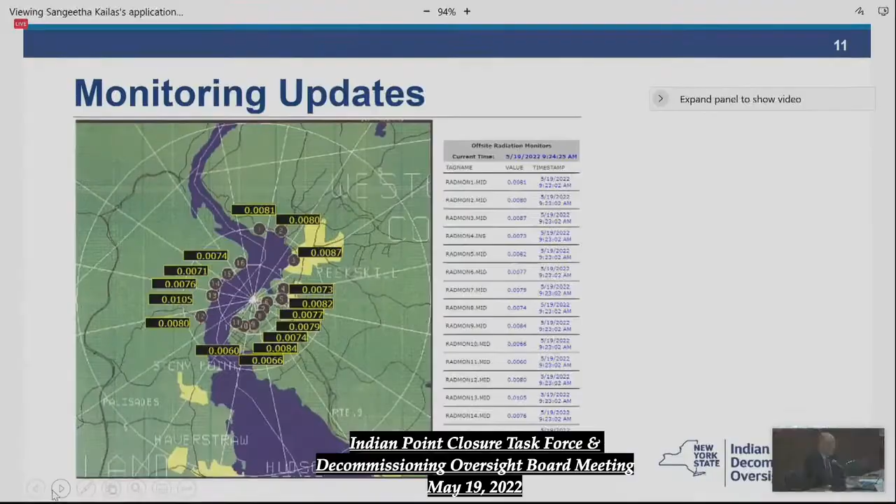In fact, this is an example that Bridget was able to receive this morning. This is this morning's data result from the monitoring. Excuse me, it's yesterday's. There are a variety of monitors in a rough circle around the site, 2 of which are near the elementary school. Again, Indian Point is a unique site that has this capability.

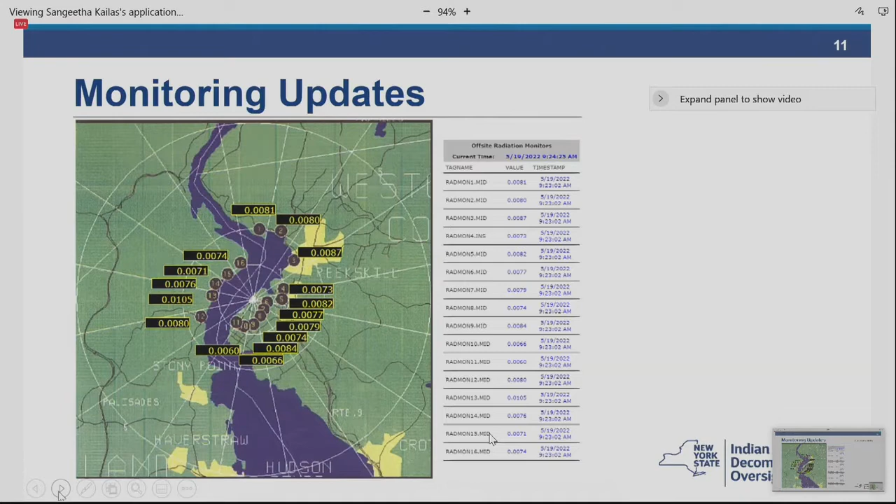It's being maintained in the short term. We think that's a positive step and promotes the public interest. I'm going to just go to the next slide. In terms of our oversight activity, DPS staff continues to visit the site and maintain contact with Holtec representatives, interacting with them on various issues.

As Tom mentioned, the state inspector position is expected to be finalized in the near future. We have also been receiving daily weather reports and other pertinent data readouts every day as required, as Holtec agreed. To date, there have been no safety concerns reported.

Next slide. One of the issues that I'm sure all folks remember from the proceedings over the last several years is financial viability, financial reporting. There have been monthly meetings since Holtec closed on the deal with Entergy, and DPS staff and staff from other expert state agencies have attended these meetings. They occur every month, and it is an opportunity for state regulatory officials to interact with Holtec and vice versa.

Holtec reports that the decommissioning project as a whole is ahead of schedule and is under budget. Also, we have received the annual financial reports that are required under both the federal regulations and the joint proposal. We are reviewing that, and we anticipate having a meeting with senior Holtec staff to review and go over that in the coming months.

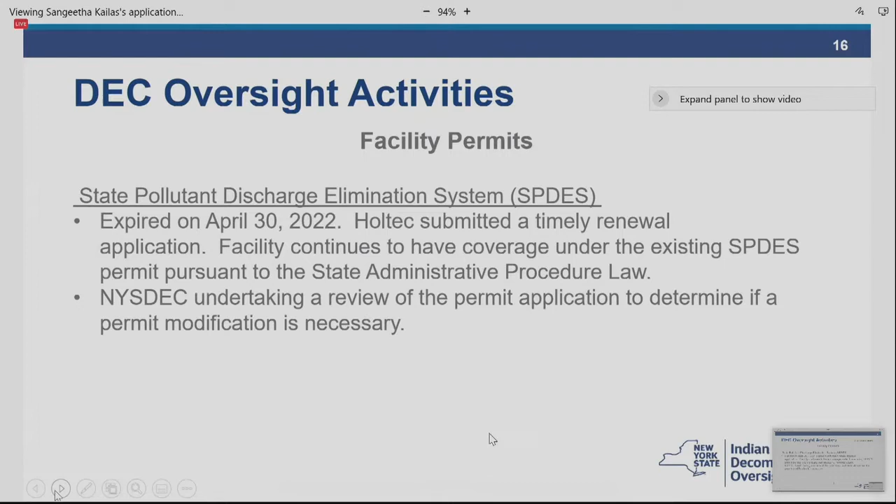Tom, a quickie - public comment on those permits? Public comment will presumably be available on those permits, on the draft SPDES, and maybe the demo. On the citizen participation plan for decommissioning, and I believe also the SPDES aspect, there will always be an opportunity for public comment, and I believe DEC would take public comment into account in its decision-making process. That's correct, John. Oh excellent, I'm so glad you can back me up. Tell Jared I was doing the right thing. Now you can bill him for your time.

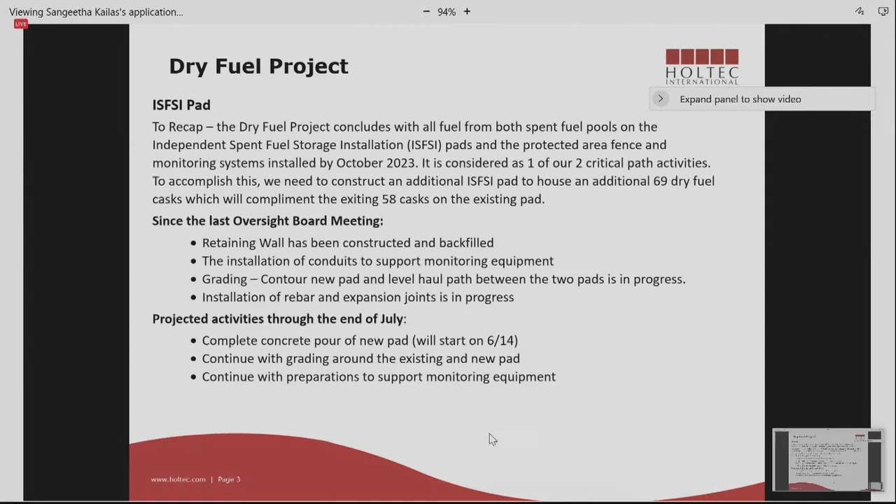So we've installed rebar and continue to install rebar on what's called the mud mat, the subsurface of the ISFSI pad. There'll be another 3 feet of concrete to pour on top of that pad. The rebar is just about complete, and the boxing around the pad is just about complete. We're going pretty well with the ISFSI pad - we expect to be done in the August timeframe. We really won't need it until later on, but we'll be done in August, which is good.

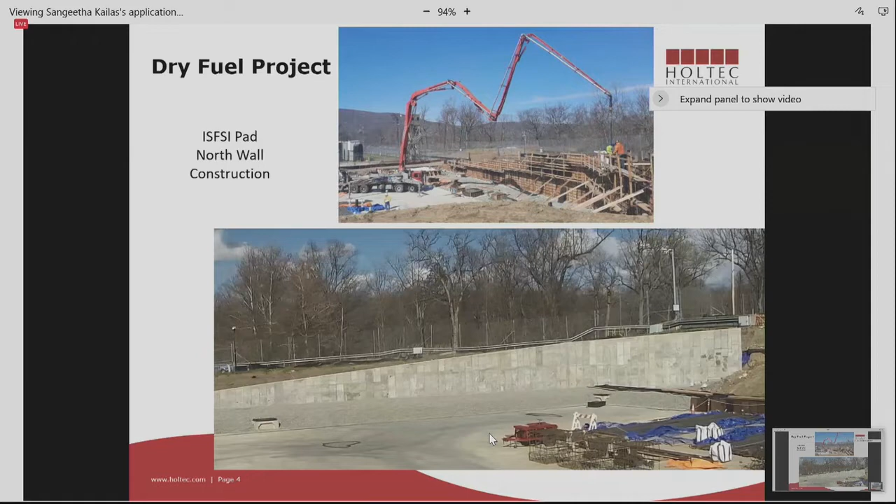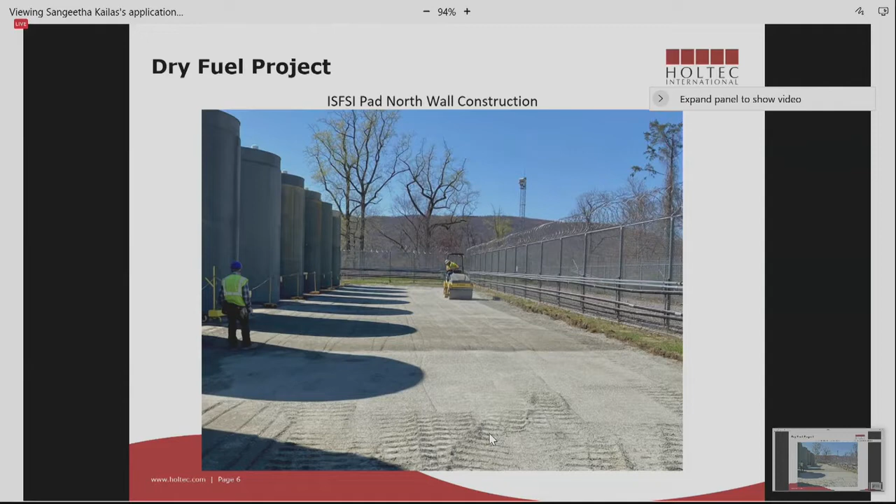The second area we're focusing on is the spent fuel pool buildings themselves. To recap, there'll be 896 fuel assemblies that need to be casked at Unit 2, requiring 28 casks. Then there'll be 1,280 assemblies that need to be casked at Unit 3, requiring 41 casks.

The Unit 2 spent fuel pool offload campaign is scheduled to start in August of this year, and we'll start the Unit 3 offload campaign in February of '23. At the present time, we are on schedule with these start dates. I've had to split the slides into two groupings, one for Unit 2 and one for Unit 3, so we'll start with Unit 2.

Since the last Oversight Board meeting, all fuel assembly inspections were completed satisfactorily - that's a requirement prior to loading any of the casks. The load plan per cask has been finalized, so we know exactly which fuel assemblies will go into each cask, given limitations on dose and kilowatts. We put in a new helium dryer that's being installed - it's going to be more efficient at drying out the casks themselves.

We started transport rail repairs outside the spent fuel pool building, and I'll show you the picture next. Projected activities through the end of July will complete the installation of the helium dryer and complete the rail repairs outside the spent fuel pool building.

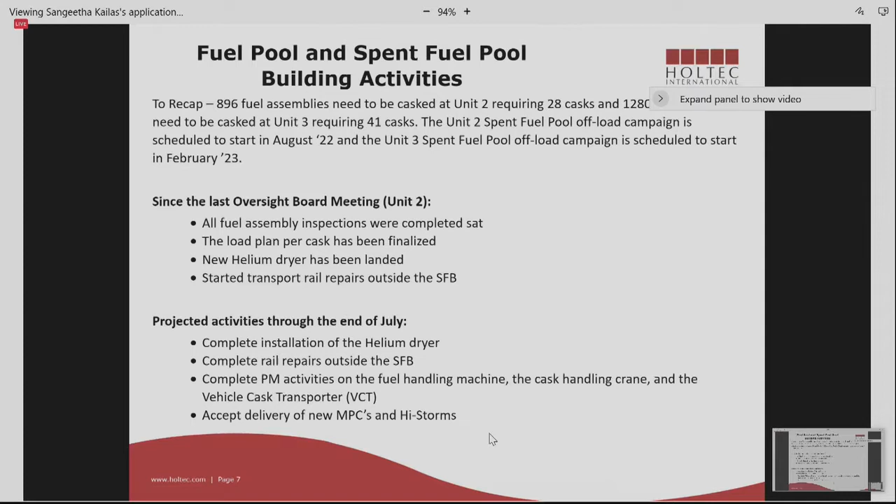Actually what we have to do is what we found in the fall when we did four casks. We found degradation in the grouting of that rail system. That rail system is used to transport the HI-STORM out of the Unit 2 spent fuel pool building. So the grouting was degraded, and we actually saw some of the rollers binding on it. So in order to prevent that from happening again, we're taking all the grouting out. We're replacing all the rails and all the bolting so that we'll have a good system to transport the HI-STORM cask out of the Unit 2 spent fuel pool.

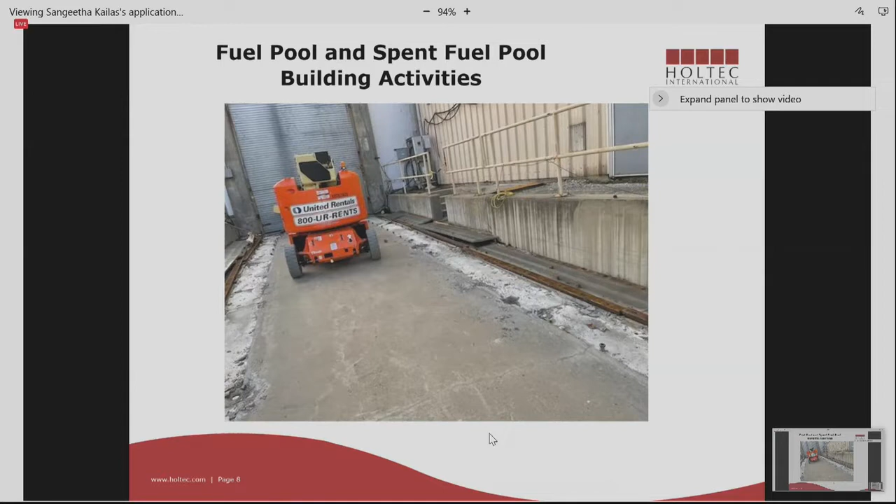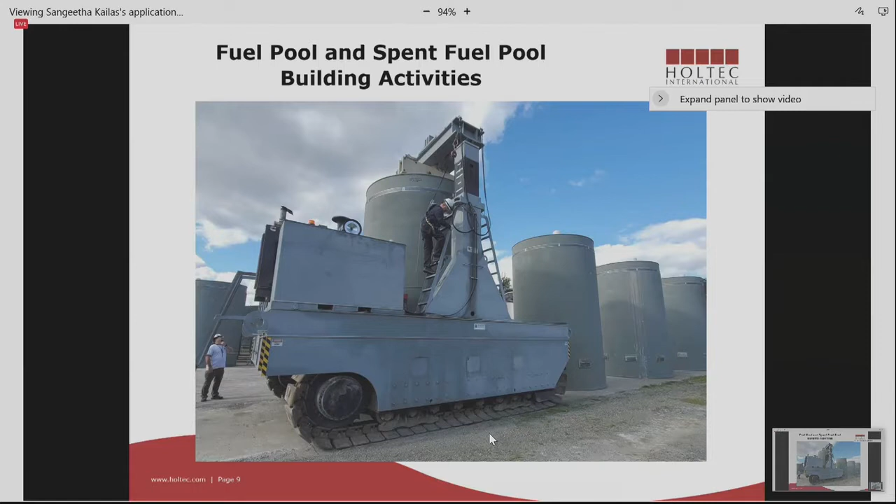So once these PM activities are all done, plus the rail outside, those were the major activities we found that needed to be done following the four casks we moved in the fall. So we'll be ready to go come August in Unit 2. Next slide.

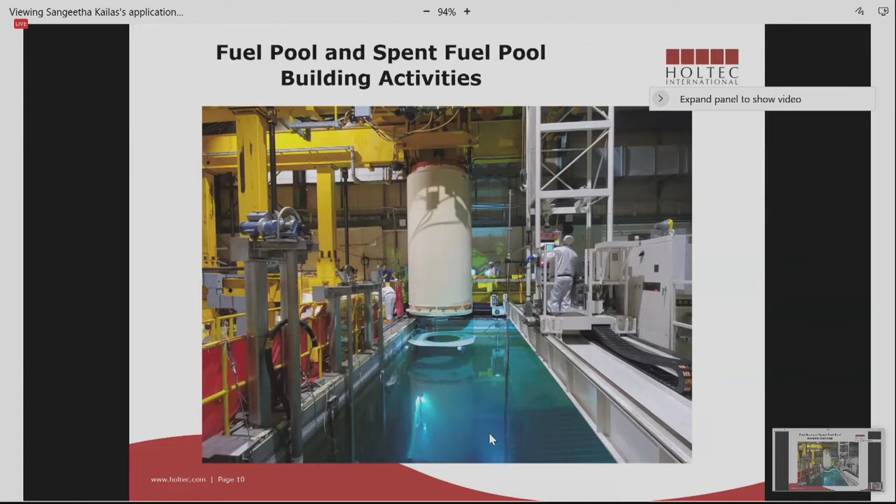So those are the near-term activities in the Unit 2 pool. Now I'll swing over to Unit 3. Since the last Oversight Board meeting, we've done all the fuel assembly inspections, so we're complete, same as we did at Unit 2.

We had to modify the suction piping to the spent fuel pool cooling pumps. That was completed due to an interference we'll have with the Hi-Lift crane, so we had to move that pipe. We've commenced removal of the backup spent fuel pool cooling system again to facilitate installation of the Hi-Lift crane.

We had to repair the floor - I'll show you pictures after. The floor wasn't in bad shape, but it housed a waste transfer system that we've since moved. That waste transfer system contained a curb. We had to remove the curb to have a flat surface in that building for transport of the casks out of the building. We're in the midst of doing that.

And then, like I said, we've completed removal of the rad waste processing skid. All of the work here, except for the first bullet, is really due to the high lift installation that we need to do.

Through the end of July, we'll continue with modifications to the building. There's some duct work that has to be relocated. The heating system within the building for worker comfort has to be repaired. There are some walkways and the backup spent fuel pool cooling system - those all have to be modified to accommodate the Hi-Lift crane installation. Next slide.

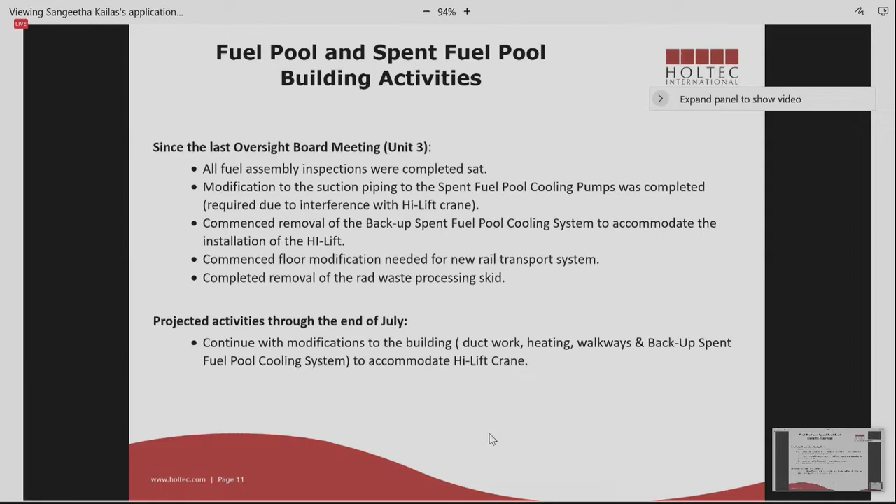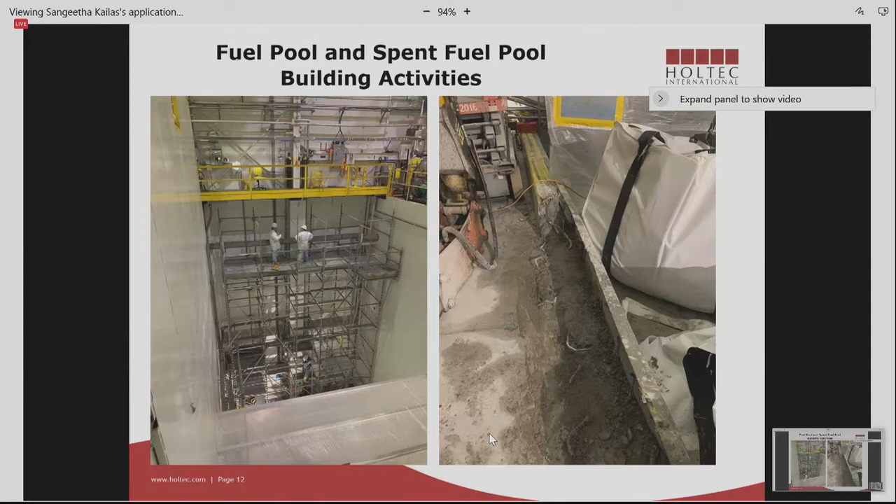So the high lift update, this is really the third area I'll discuss tonight in our plans to install the Hi-Lift in the Unit 3 spent fuel pool building. We did submit an LAR to the NRC March 24th of 2020, requesting the installation of the Hi-Lift crane, and the NRC granted approval through a safety evaluation report dated February 25th of 2022.

Since the last Oversight Board meeting, parts required for assembly have been delivered. We still need additional parts to be delivered for full assembly. Construction of the crane has started for the factory acceptance test, and that'll be done at Holtec's facility in Pittsburgh. The engineering change package to facilitate the installation at the site has been started, and that'll be completed in August. Projected activities through the end of July: complete the crane fabrication by June 1st. The factory acceptance test is currently scheduled for June 10th, and then the high lift will arrive on site 7/8.

I don't think we're going to meet those dates. We're having some issues with the materials being shipped from overseas, I believe, so those dates will slip, and I'll have a better idea after the July meeting when we will do those three activities. However, we're still confident that we'll meet the February 23 date.

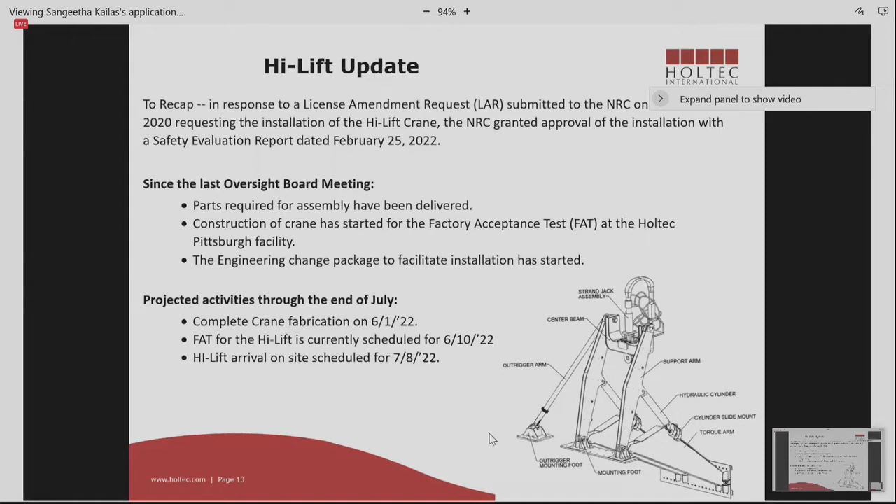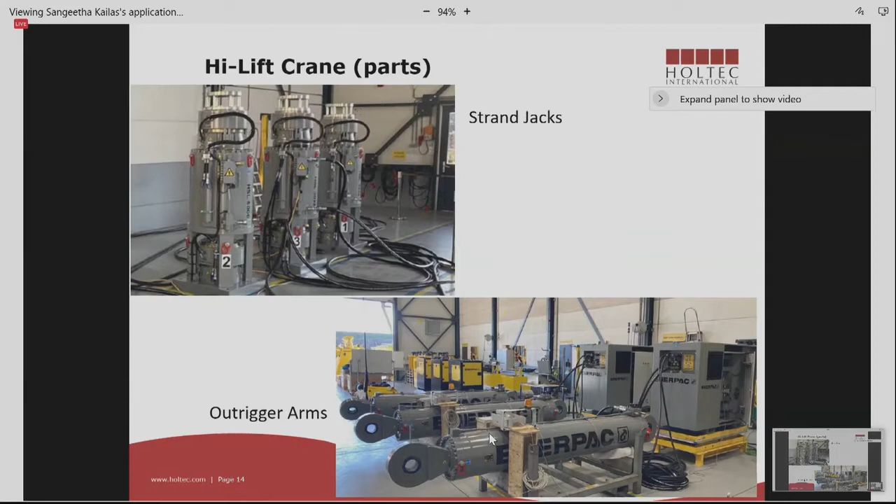Our critical path is pool to pad, and October of '23 is our due date. Are there any questions on pool to pad before I go any further?

So, Rich, I'm going to read a question. There was a mention of fuel on pad protected, but Holtec did not specify what the fuel is protected from. Could you describe what it's protected from?

Sure. What happens if there's a pipeline rupture, fire, or anything else? We have a protected area of the site; most of the people who've been there have punched in. That protected area of the site shrinks down to basically the two ISFSI pads, right? So that's what we call fuel on pad protected, where the protected area of the site is now minimized just to protect the fuel itself. By protection, we have a full-blown security system, right, monitoring equipment, security housing facility, that all comes with that. And that's on the northern side of the site.

Correct, it's the north side. I guess I should have shown it, I'm sorry. The new ISFSI pad expansion is right next to the existing ISFSI pad.

Sandy Galiff again, maybe I should know this - what's the helium dryer? That's a good question. So what that does is we dry out the cask, we dry the fuel, because it goes in wet, right, it goes into the MPC wet. So we use the helium dryer to totally evacuate any moisture out of the cask itself. We use a helium-based system.

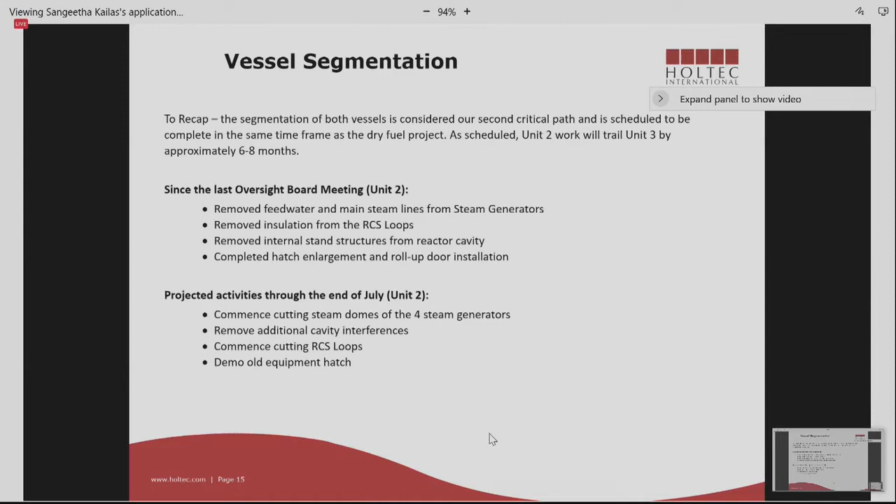Projected activities through the end of July: we should commence cutting steam domes of the four steam generators. I'll show you pictures of that and why we're doing it. In fact, we started on steam generator 21 this week, cutting its steam dome. We'll remove additional cavity interferences, commence cutting the RCS loops, and demo the old equipment hatch. Next slide.

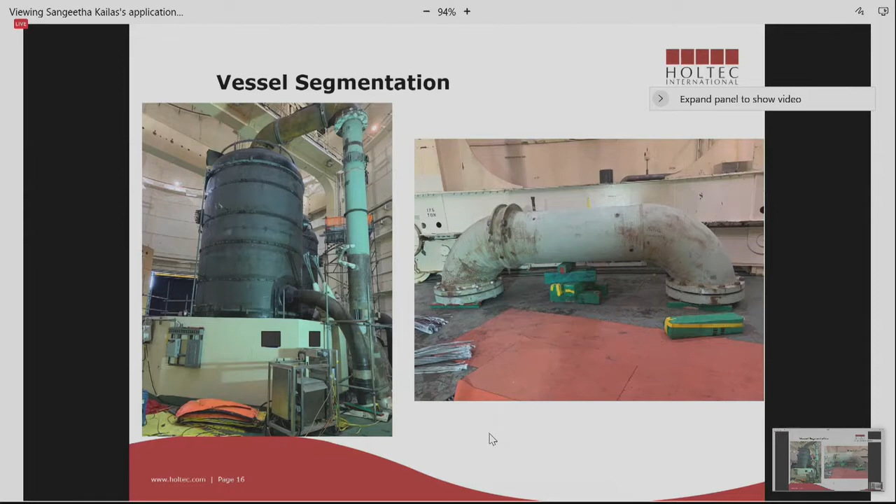And then we've completed the enlargement of the equipment hatch at Unit 2. We used the same diamond wire cutting technique that was used at Unit 3. It's a water-cooled system that limited, or generated absolutely no dust. We also kept the building at a negative pressure so that all air flow was inside the building and not out. So that equipment hatch is now complete at both units.

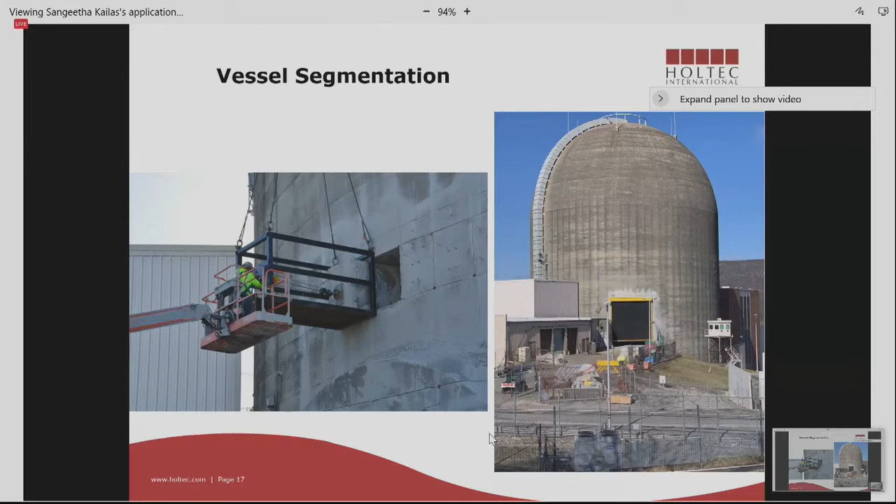So now I'll transfer over to Unit 3. All 4 steam generator domes have been cut. 3 of the 8 RCS loops have been cut and isolated from the reactor. The old equipment hatch has been disassembled and disposed of. The missile shield blocks have been removed and disposed of. The missile shield blocks are actually a series of huge concrete blocks on top of the reactor held by a support system. Those have all been removed and disposed of. The nuclear instrumentation detectors, you might have heard the term NIs, have been removed and are being disposed of. We've commenced installation of the transport system, which will be used to transport heavy loads out of containment. And we've commenced training of individuals responsible for segmentation activities.

And then the projected activities through the end of July: we'll complete the transport system and remove the steam generator domes, complete the segmentation team training, ship the segmentation tooling following the training to the site, continue with the RCS loop cuts, and prep for tooling and support structure installation in the reactor cavity. So the next set of pictures will help explain all this.

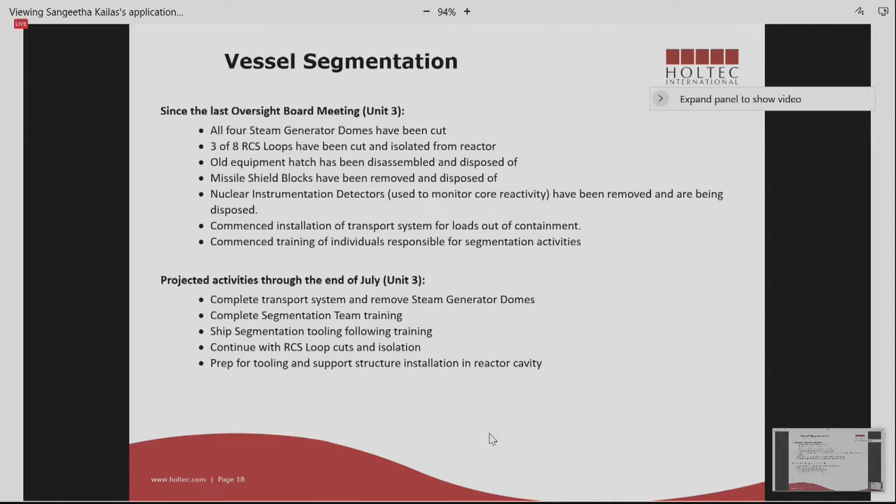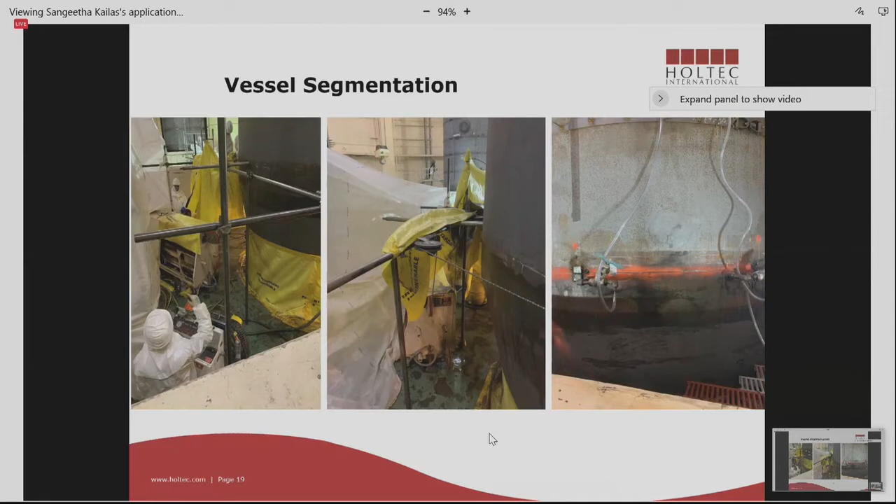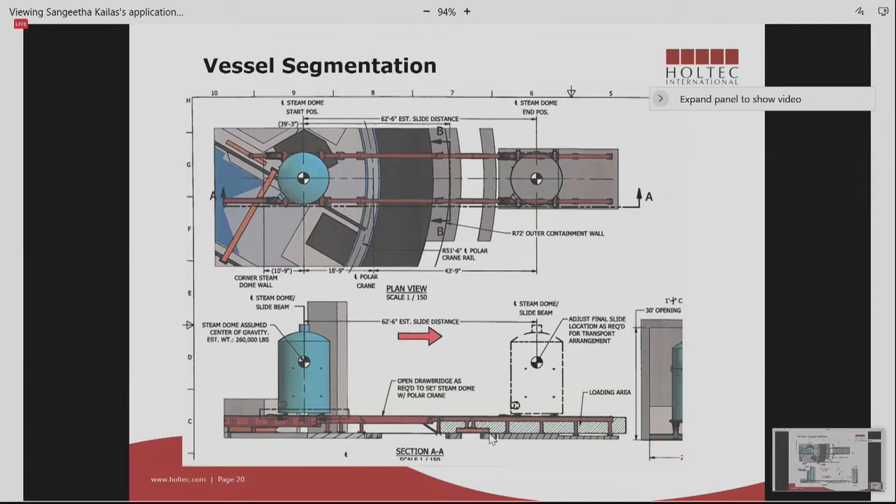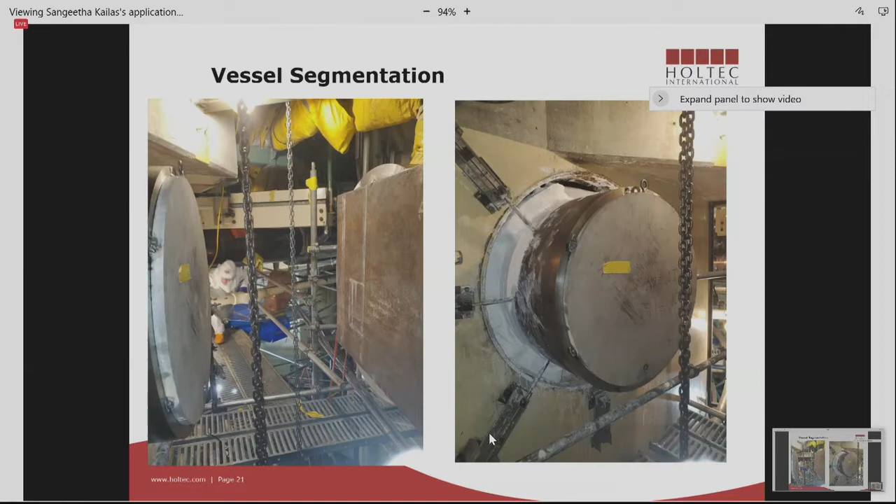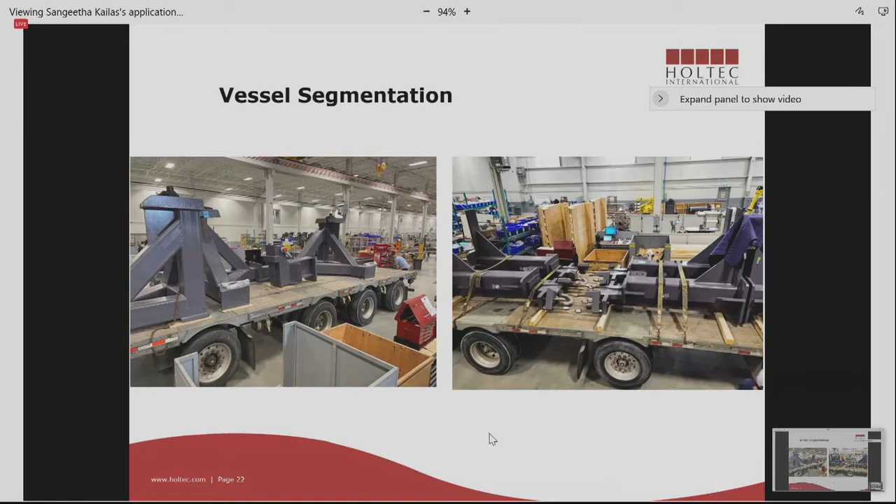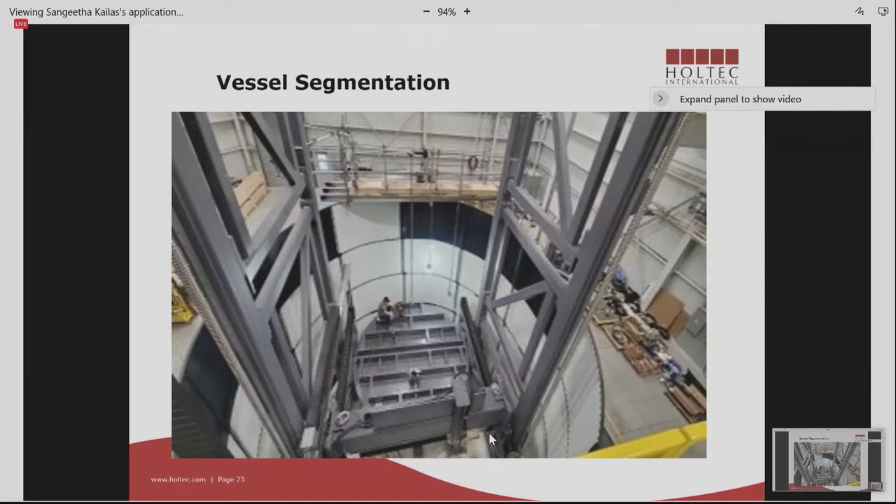So that wraps up my discussion on vessel segmentation, pending any questions.

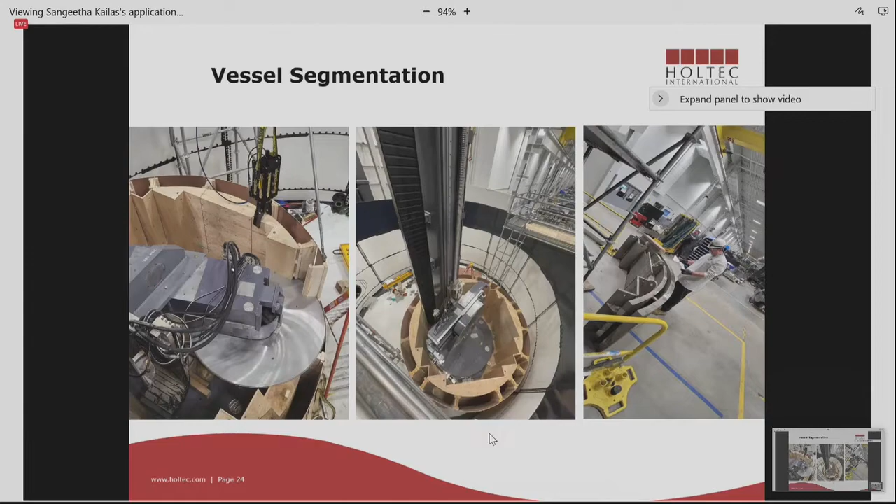Tom? Yeah, Tom? Thank you, Rich. Tom Carey. Hey, Tom. So just thinking about the older generators, like the ones we took out of Unit 2, they're probably roughly 20 years old, right? Why are those in a vault and these new ones are just going to get shipped out? They don't have to remain on site for any period of time?

Well, actually, the ones in the vault had to be replaced because of steam generator leaks we had years past. So that's why they're in the mausoleum, so to speak. These are being cut to facilitate a platform that will need to house some of this equipment for vessel segmentation. So we're able to cut those domes, and the steam side is basically clean. The ones in the mausoleum had tube leaks that contaminated the internals of those steam generators.

So these are clean compared to what's in the mausoleums themselves. Then there's a whole process we're going to go through. We're bringing in a couple different vendors as to how we can clean those steam generators in the mausoleums. And same goes for the reactor?

The reactor's going to be cut up. There's 3 different levels of waste, which require 3 different types of canisters. So when those come in, and as we cut the vessel itself and the internals, they'll go into canisters, and those canisters will get shipped to Texas, by rail and road.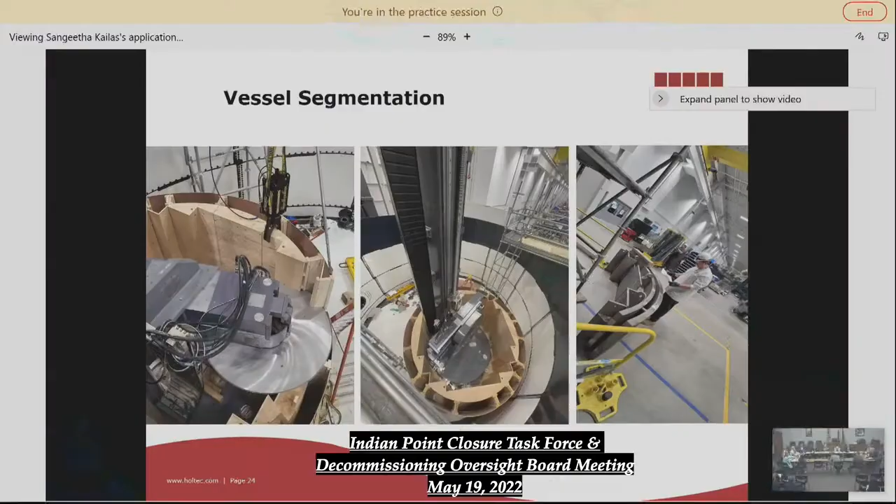So there are people who will be somewhere, activating, operating the saws remotely over these platforms I was talking about. Got it, so there's nobody actually in there. They're not going to be on top of the saw. Are they inside the reactor? No, they'll be on the platform, and that's why I need that working platform, so they can control the saw. And how are they protected from any nuclear dose?

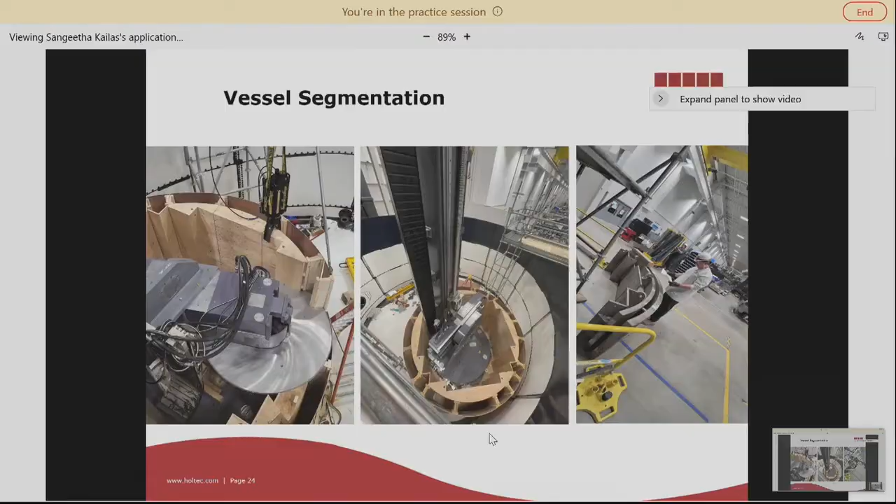The dose rates will have the cavity filled to the top with water, just like we do for every refueling. So you flood it up, but then as you cut it down, you reduce the amount of water, is that how it works? We're probably going to cut the vessel dry. Everything internal to the vessel will be cut underwater, but there comes a point where you have to cut the vessel dry, because if you don't, you'll just flood out the whole containment building.

Anything else on segmentation? Okay, let's go to building demolition.

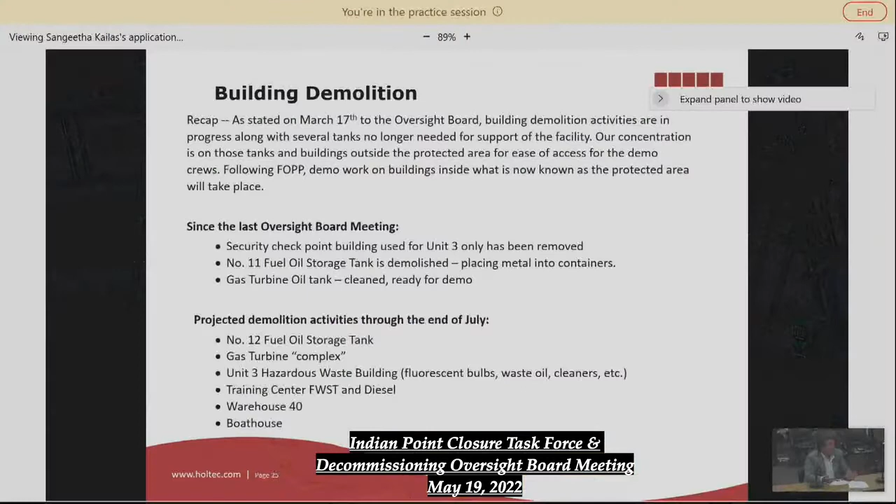Since March 17th, when I talked to the Oversight Board, we discussed building demolition activities, and they are in progress, along with several tanks no longer needed to support the facility. Our concentration is really on those tanks and buildings outside the protected area, just for ease of access for the demo crews. Then, following fuel on pad protected, when the protected area shrinks for the site, we'll have easier access to some of the larger buildings.

So with that said, since our last Oversight Board meeting, we demoed a security checkpoint building that was used for Unit 3 years ago. That's been removed. The number 11 fuel oil storage tank is demolished, and we're placing that metal into containers. And the gas turbine oil tank, I'll show you pictures, that's been cleaned and ready for demo.

The other major contractor on site is Champion. They've been doing most of this demo work, and we've had no issues with them either. So they're working out well.

Projected activities through the end of July: the number 12 fuel oil storage tank, we've already started taking that down. The gas turbine complex, which is actually across the street, used to house gas turbines back in the day, no longer used for many years. We're going to take that down.

Then we have some metal enclosures or metal buildings. One was a Unit 3 hazardous waste building. I don't want to alarm people about that, any fluorescent lights, waste oil, cleaners, what we called hazardous waste. We'll clean out that building accordingly, and then we'll take it down. The training center firewater storage tank and its diesel, we need to remove that to support storing some of our radioactive waste before it gets shipped. And then one warehouse, and then we have actually a boathouse that we store a boat in.

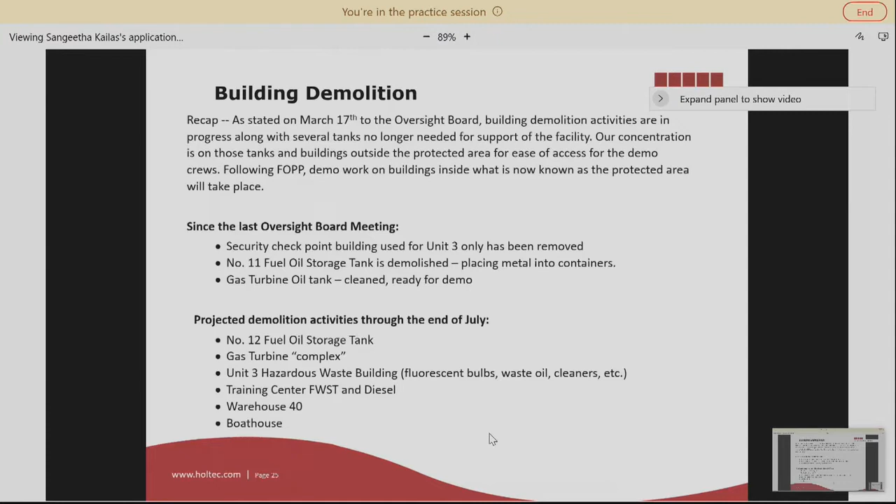So if we turn the page, next slide. Top left was the security shack that we took down, and you could see that's down by the blank picture next to it. Next slide.

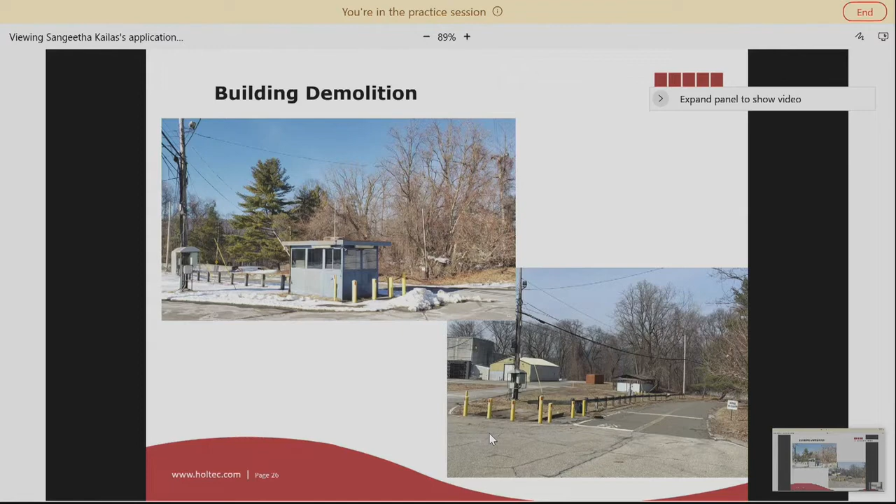So this is the big building demo that we're doing so far. That's number 11 tank. It's been there. It used to house number 6 oil that was used to superheat steam in Unit 1 years ago. So right now, we've cut that all up. We're putting the pieces together. Before we cut it, we had Clean Harbors come in and clean out the tanks accordingly. So we are cutting up the steel now and shipping that steel out.

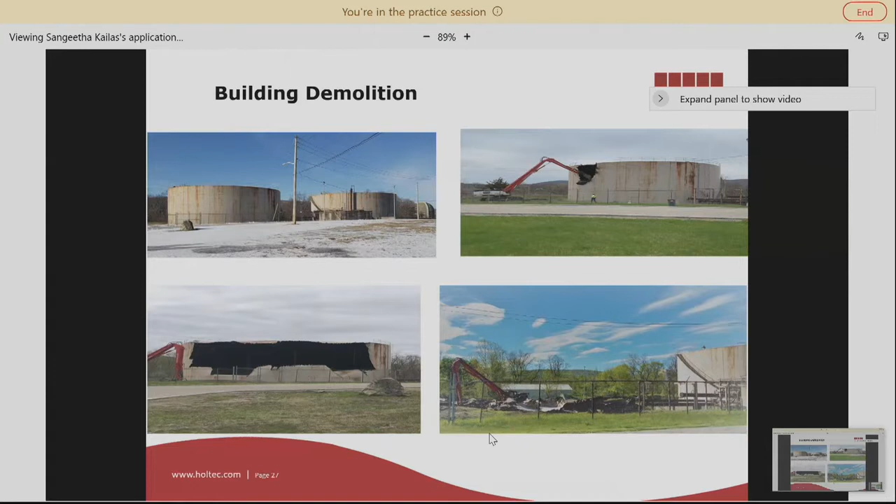Next slide. That's the next tank we'll hit. That was a diesel oil tank that we use for our emergency diesels. That was part of our tech specs that required that tank. That tank's been cleaned, and it's ready to come down. That'll come down next after number 12 fuel oil tank.

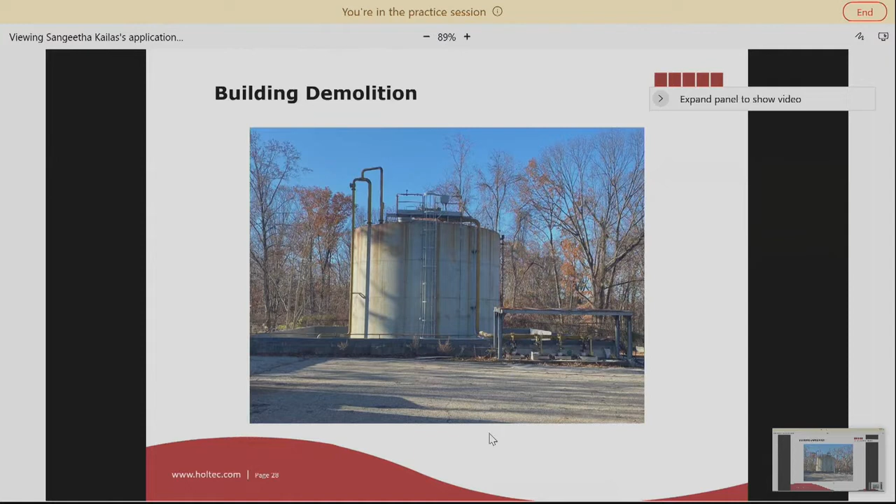Next slide. That's the next tank that will come down. It doesn't look like that right now. It's just about, I'd say, halfway done. And we should finish that up over the next 2 weeks.

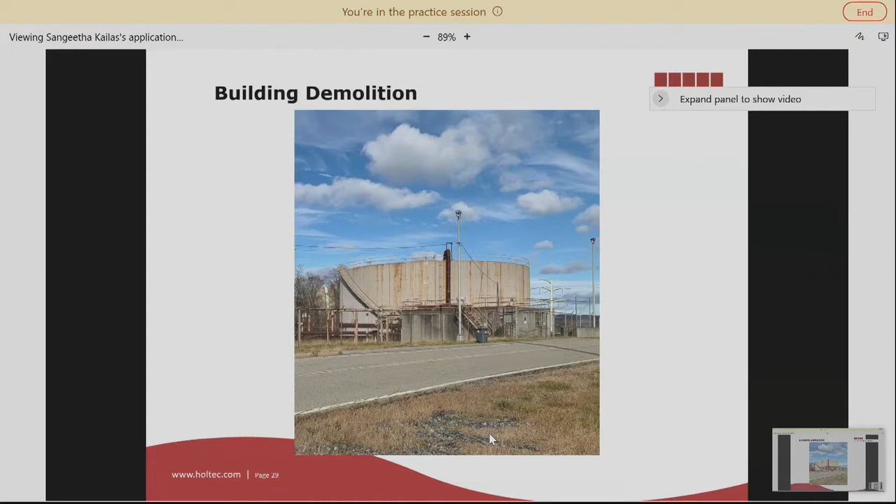Next slide. That's the gas turbine complex that's across the street from us, right next to the switch yard, the Buchanan switch yard that's owned by Edison. So that'll be the next project, to take all those buildings down. Those are all metal buildings. There's no concrete there.

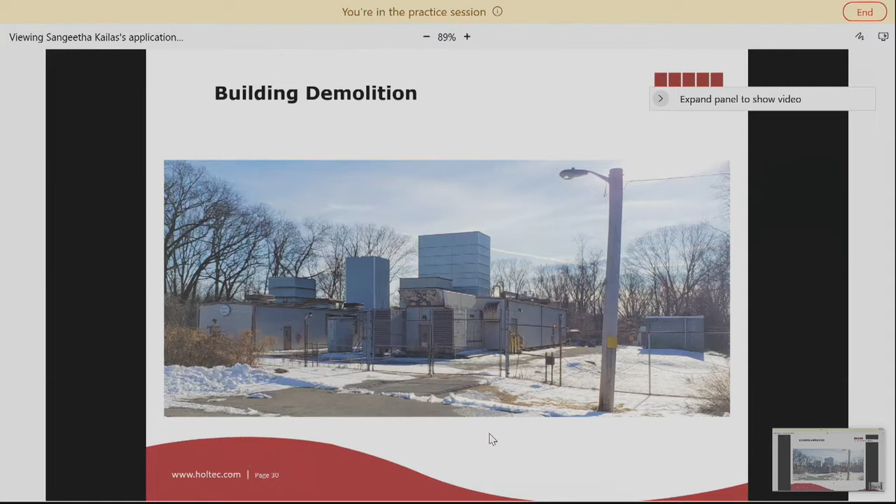Next slide. That's the hazardous waste building we're taking down. Again, another metal enclosure. And then the next slide is the fire water storage tank for the training building that we're no longer using.

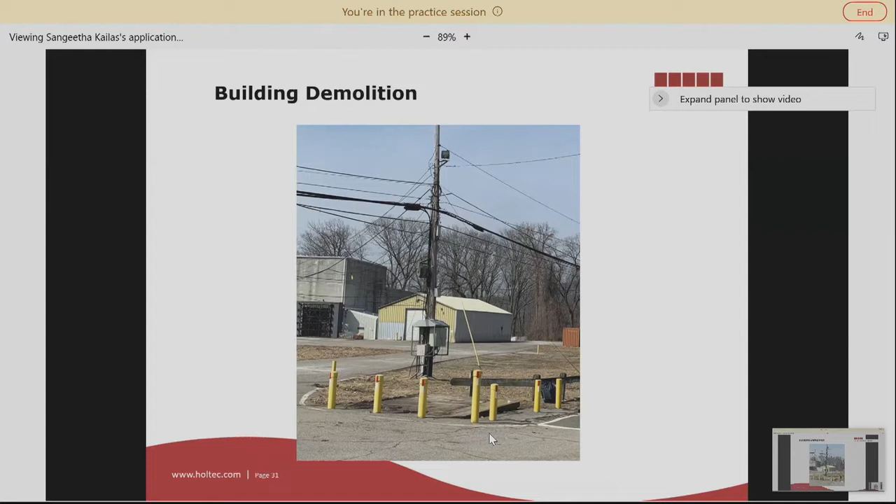Next slide. Next slide. Thank you. All right, so we're taking down that tank also, and that'll help us with loading some of our waste casks into a flex building.

So that's all I have for building demo through the end of July. We have a schedule in place to take down additional structures, not all the buildings though, but we have a schedule in place through the third quarter of 2024. I talked last time about the domes. We're still on a 10 to 12 year projected time frame to take those down. But I just want to be clear that we are taking buildings down external to some of the larger buildings around the site. So that's going pretty well right now. That's all I have on building demo, pending any questions.

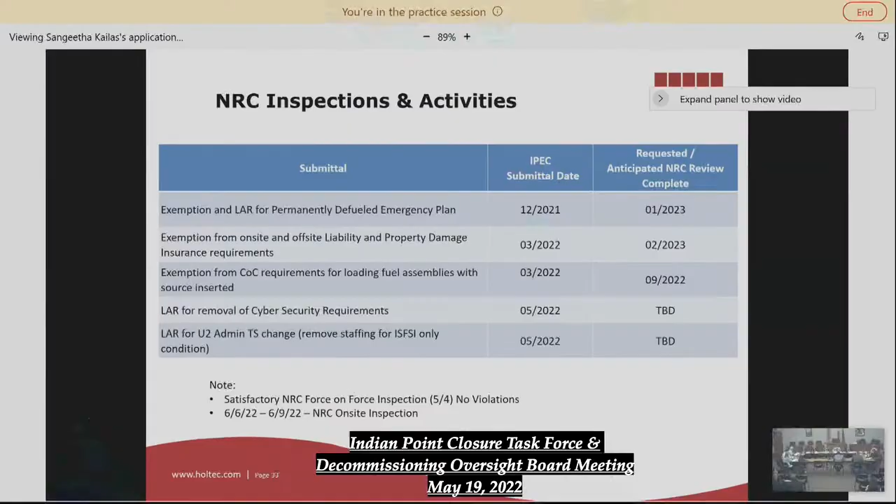All right, so we touched upon this briefly before in the meeting. These are basically the exemption requests that we have placed with the NRC. So the exemption process is in accordance with 10 CFR 50.11, which is entitled Exceptions and Exemptions for licensing requirements, and then it kicks you out to 10 CFR 50.12. Most of these, I'd say 3 out of the 5, are really based on the zirc fire window. So what's that?

The zirc fire window is a period of time where you can expose the fuel in your spent fuel pool for 10 hours without a zirc fire reaction. So zircaloy metal is the metal that's used to encapsulate the fuel pellets in a fuel assembly. Based on the zirc fire calculations, right now, actually it's August 1st of this year when we meet that 10-hour requirement. So none of these dates reflect August 1st because when we submit the LARs, we have a discussion with the NRC. They have a workload schedule, much like any one of us. So what they project is the return dates based on their review cycle. Now I understand the state reviews these also, and they may object to them. So we'll just follow the process, and we'll see what the NRC says at the end of the day.

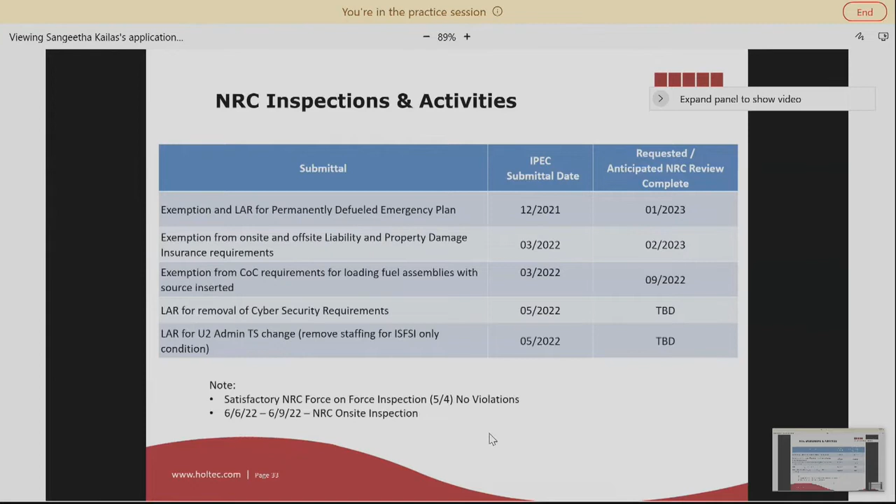And Rich, this is John Sipos, just one clarification. I think you said 10-year. I think you meant 10-hour. We'll meet the... on the zirc, I think it was on the window. You said it was a 10-year. The zirc fire window says... Right. Now you got me confused, John. The zirc fire window says that you can expose your fuel for 10 hours without a zirc fire reaction. Not 10... did I say 10 years? I think at one point you inadvertently probably did. I apologize for that. So we'll meet that 10-hour requirement come August 1st.

So really, the actuality of this is if the NRC had additional resources and they approved the exemption request, we could go into the PDEP August 1st. But they don't have the resources to meet that requirement. So, any questions on NRC inspections and activity?

Yeah, this is Richard here. So the thing I find strange about this exemption thing is that people talk about them as though the NRC regulations are ridiculously tight, and so therefore we need an exemption. I guess that isn't my experience. So can you motivate a little bit more, particularly on emergency planning, why you'd want to go the exemption process rather than the NRC regulations? We're not the only plant in the country that's filing exemptions. Are all plants exceptional? All plants are doing it. Are they all exceptional?

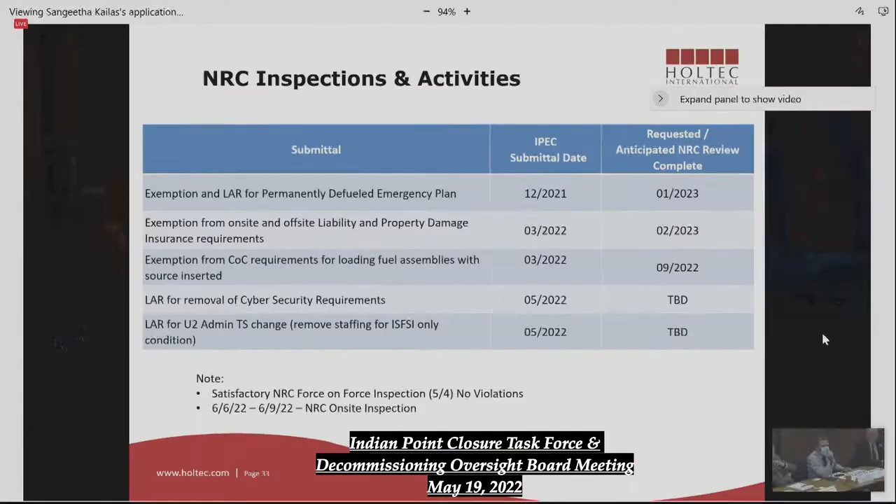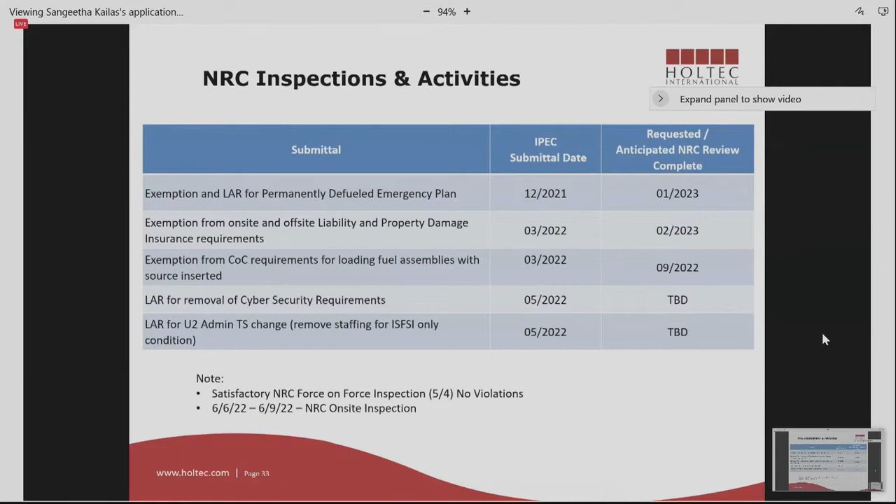Is the speaker on that computer turned on? Because the microphone should only be pointed at that computer. If the AV team could please come out and do a check here, because that's what creates the echo—the microphone's picking up the speaker from the computer along with the microphone on the computer. We'll check on that. You're getting some advice up here.

Sometimes we do, like if Dave will call you, you can speak through your phone. I don't know if somebody could do that, because we do that too at Village Works. Just a nightmare—they tested it last week.

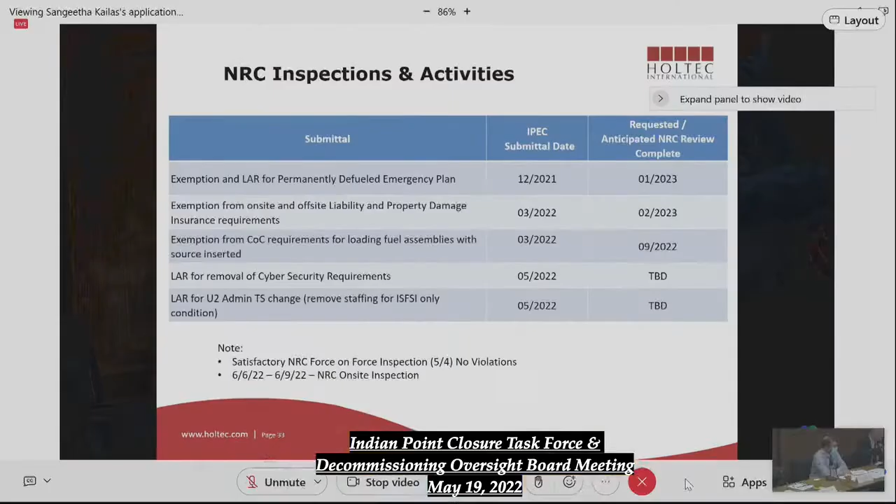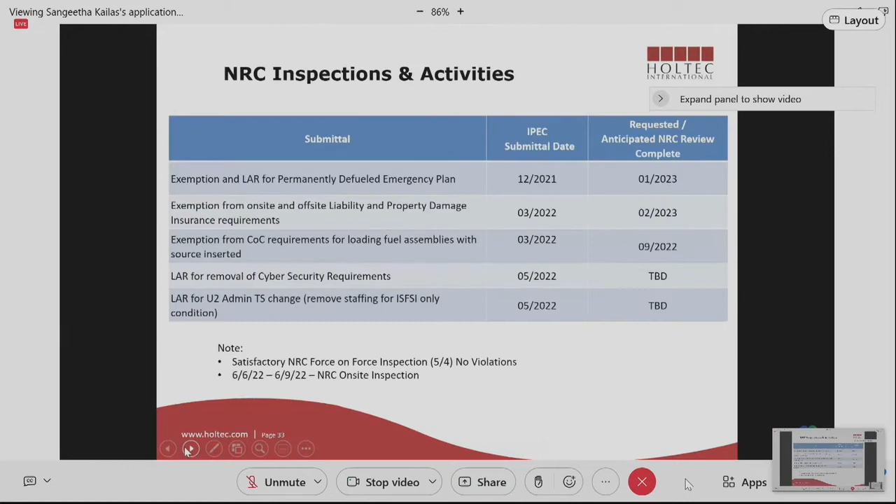And then we want to try to install some type of real-time online RAD monitoring system to avoid cartridges being sent out. I think some type of real-time monitoring system would be better. So we'll work with them on that.

The last bullet, we're working on property allowance south of the plant, for the town of Cortlandt, to have access to a new recreation facility that they're looking at. So I left the first bullet for last because I know there's passion here.

So we did sign an MOU with Enbridge on the gas lines that go through the site. I think it's important that I read this so everybody's on the same page.

It was signed off by myself and Mr. Wooden, who is the vice president at Algonquin. So it notes the following: during the term, as defined below - and the term is one year.

So long as the steel plates remain in their current place, the 5-day advance notice described in Section 1D of the joint proposal shall not be required for any heavy load pipeline crossing. Where possible, if heavy load pipeline crossings using the steel plate can be avoided and an alternate traffic pattern can be employed, HDI is committed to do so.

HDI site engineering will perform weekly inspections to ensure the configuration of the air bridge remains unchanged. These inspections will be captured in HDI's corrective action program, which it is - so I have an engineer going up there once a week at least.

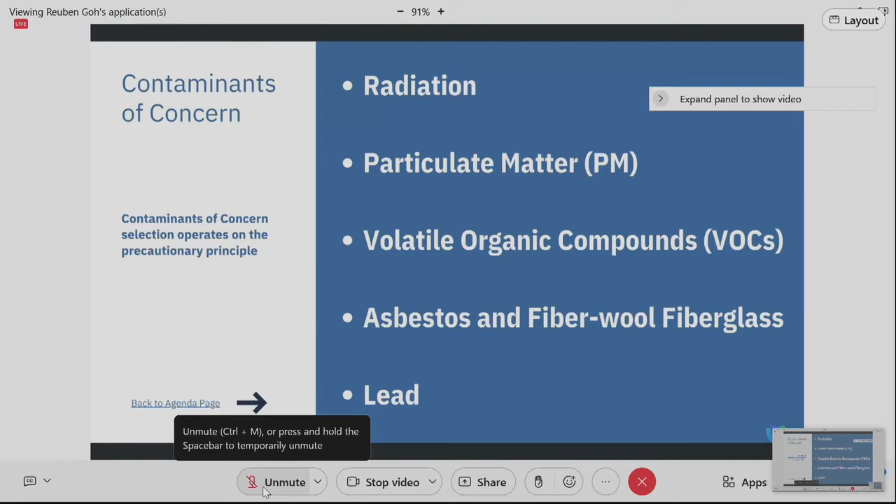So, having already chosen the contaminants of concern, we moved to a plan of action and developed a plan with 3 monitoring scenarios to monitor the COCs both inside and outside the school buildings. Why 3 monitoring scenarios? Because we want to provide this to decision-makers so they can consider the variables and choose the best pathway. Later, we evaluated the relevant technologies for all the contaminants of concern: effectiveness, data accessibility, cost and maintenance. We adopted a cautionary, conservative, preemptive approach—remember the precautionary principle, this is because we want to be preemptive—and we recommend monitoring plans based on risk to human health, effectiveness, implementability, and costs.

So what are the 3 monitoring scenarios we'll be discussing? The first one is business as usual, which is the least amount of effort and cost. Business as usual means we continue the same efforts we're doing today—that is, Holtec radiation monitoring and air quality monitoring, done over 6 months at the school. It doesn't mean no effort; it means we continue with the current efforts that are being done today.

The second scenario is real-time monitoring for PMs and VOCs, which we consider as a team a medium amount of effort and cost effectiveness. The third scenario is real-time monitoring for PMs, VOCs, and radiation, which we consider extensive effort and more frequent monitoring of all COCs.

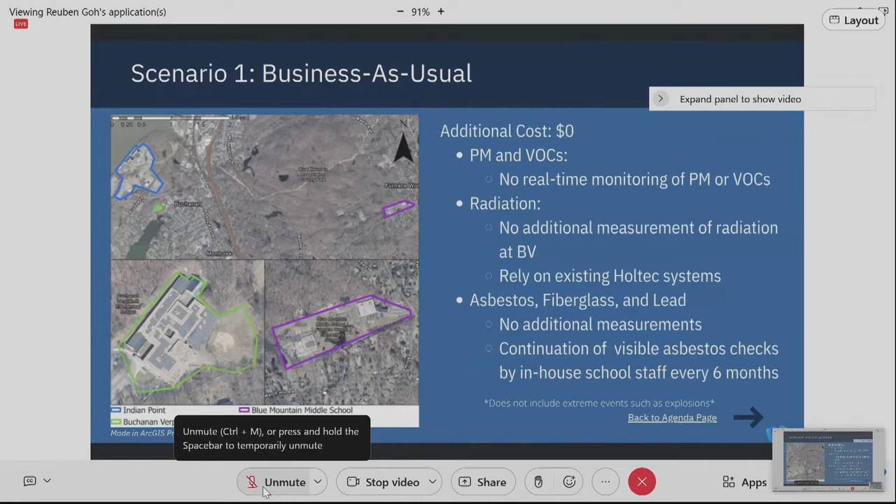Moving on, we have scenario 2, which would involve real-time monitoring for PM and VOCs. The additional cost incurred for this would be about $192,000.

For PM and VOCs, this involves outdoor real-time air monitoring using the AQS-1 and the AQM-65 from a company called AeroQual. On the left you can see a diagrammatic representation of where we propose these monitors be placed: in blue is Indian Point, in green is BV, and slightly further away is Blue Mountain Middle School, which will serve as our control site given the topography and distance.

Placing one of each air monitor allows us to form a correlation between any contamination released from IP that reaches BV, and having a control allows us to see what the ambient air quality would be like. The AQM-65, the more robust of the two units, would be placed within BV, our primary site of concern. In addition, indoor real-time monitoring also happens, using PurpleAir sensors.

You can see them on the left side dotted around the BV campus indoors that would allow us to account for both outdoor and indoor air quality.

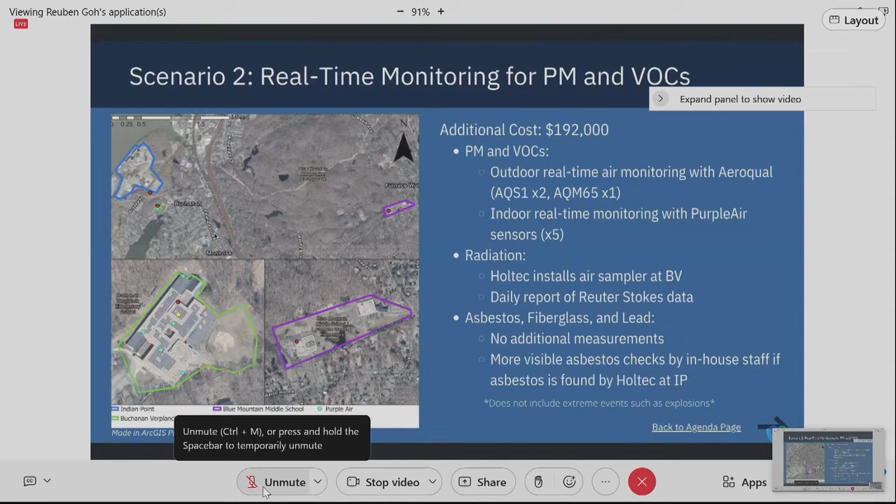Finally, for scenario 3, we have real-time monitoring of PM, VOCs, and radiation, and the additional cost of this is about $403,650. The main difference between scenario 2 and 3 is that the AQS-1 units, which are slightly less robust, get elevated to the AQM-65, which is AeroQual's most robust offering, replacing the AQS-1 sensors at IP and Blue Mountain Middle School.

We also increased the indoor real-time monitoring with PurpleAir sensors to include all the classrooms, so there's actual accuracy for each individual classroom rather than a generalized proxy for one classroom representing multiple.

For radiation, on top of recommending that Holtec installs an air sampler at BV and a daily report of Reuter Stokes data, we also recommend the employment of real-time radiation monitoring using the EcoGamma-G radiation monitor. This will allow us to know in real time what kind of radiation levels we are experiencing on site, and that can transfer into a policy framework, which I'll go into right after this.

And of course, for asbestos, fiberglass, and lead, BV will hire professionals if lead, asbestos, or fiberglass is found at IP to carry out any abatement processes that need to happen.

A key qualification is that none of these scenarios include any kind of extreme, unforeseen, catastrophic events, such as explosions or any kind of sabotage that might happen. So that's a key qualification in the presupposition that all these scenarios do not consider.

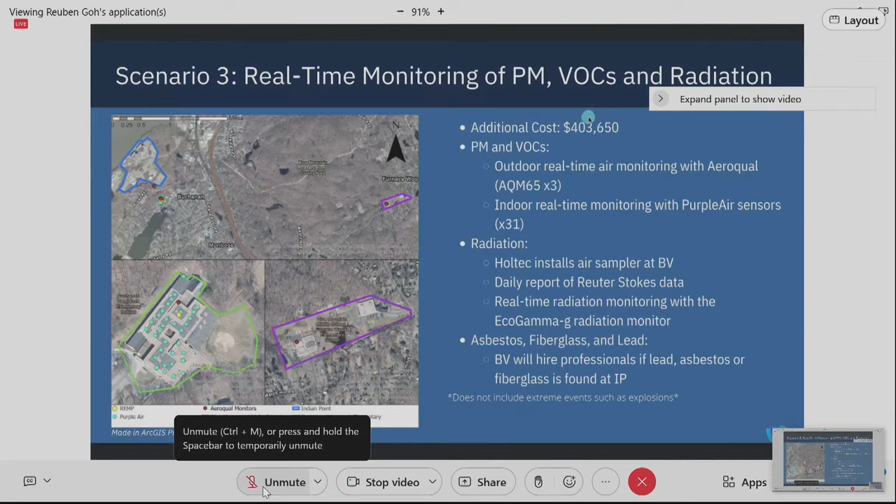It speaks to the relative importance that we foresee of each individual COC along the decommissioning timeline. For short-term effectiveness, we're looking at things like radiation. For long-term effectiveness, we're looking at things like VOCs from increased solvent use on site, or increased vehicular traffic from transporting material, and also things like PM from any kind of deconstruction activities that might go on site.

So for scenario 1, we're seeing it fails on the parameters of risk to human health because there's no additional monitoring. Short-term effectiveness is accounted for because radiation is being monitored, but long-term effectiveness does not constitute any of the additional COCs that we are concerned about, so it fails on that grounds. Implementability is easy because there's no additional effort, and cost is also easy because there's no additional cost.

Scenario 3 passes for risk to human health, short-term and long-term effectiveness, because it's the most robust and rigorous scenario we've proposed. The problem is that implementability is low, mainly because of the high costs associated with the project, and also because some of the data might be more difficult to access, requiring more training for staff, especially when that handover process happens.

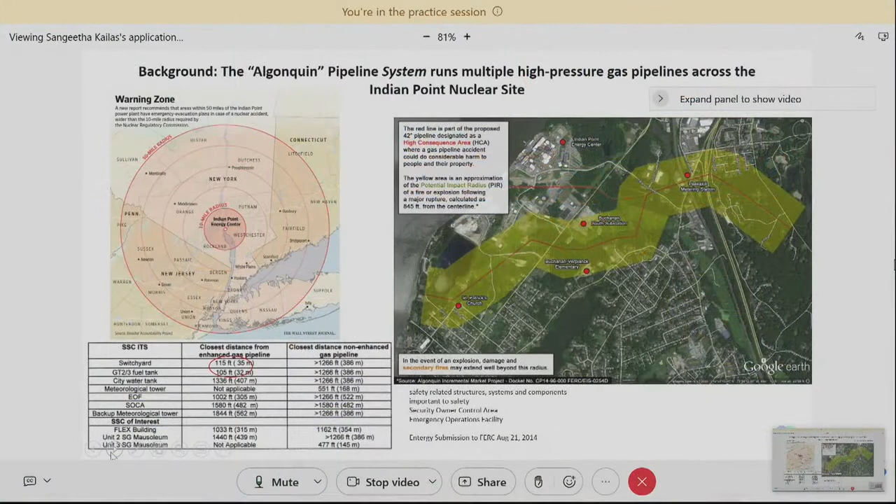If we can back up one slide - that was my intro slide, and the kids you saw in the picture with me are my kids, one currently at BV, the other graduated from BV. I've been doing this work regarding the co-location of the pipelines at Indian Point since 2013. So have a lot of... oh, it's back, great. All right, if we could go back one slide, but if that's going to mess stuff up, we don't need to. Okay, great.

So yes, I live in Peekskill. I'm a parent of 2 Hendrick Hudson students, member of the City of Peekskill Conservation Advisory Council, co-founded Safe Energy Rights Group specifically to address the safety issues of Indian Point and the pipelines. Recently founded Westchester Alliance for Sustainable Solutions to address air pollution from the Wheelabrator trash incinerator. Have participated in the consultation on climate and use during the Universal Periodic Review for the United Nations. And let's see, relevant stuff - yeah, the rest we can move on to. I'm currently employed as a cancer researcher, but here today as a parent and advocate.

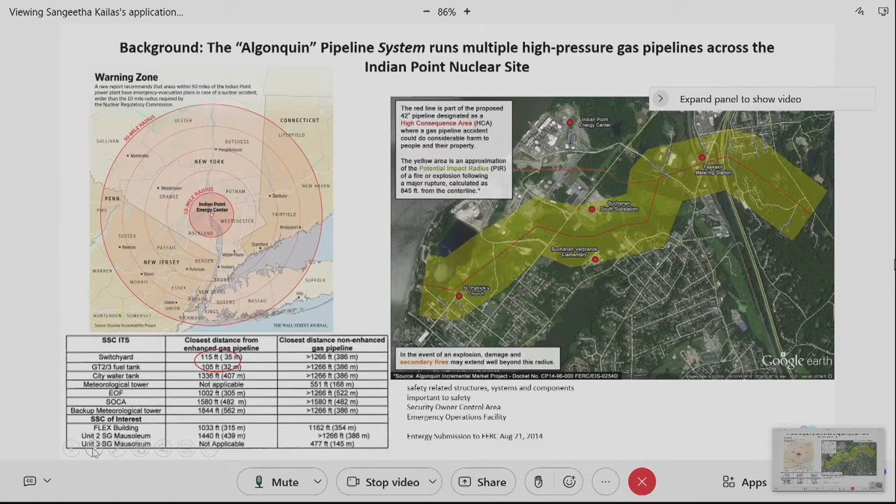So question for DPS, do you acknowledge - and I'm asking DPS because for folks listening, PHMSA delegates some authority to DPS for oversight of pipeline safety - do we acknowledge the failure and call upon PHMSA to produce a federally compliant risk analysis and integrity management plan as required by federal law?

So we have gas safety team on the phone, and I'm going to just take the questions and answers. No, we have technical staff that would probably add a lot more detail than I. Okay, but in the interest of time and technology...

I will tell you this issue has been raised over the years. Former Congresswoman Nita Lowey wrote to us specifically citing these very regulations. We wrote back to her after having consulted with PHMSA to request that they confirm compliance. They did confirm compliance with these regulations specified. The company has produced the risk assessment and integrity management plan to PHMSA as they are required to do, and PHMSA confirmed that. PHMSA is also currently conducting an audit of the current integrity management plan, since this is an ongoing review that's regularly updated, and the DPS gas safety team is a party to that. Okay, next slide please.

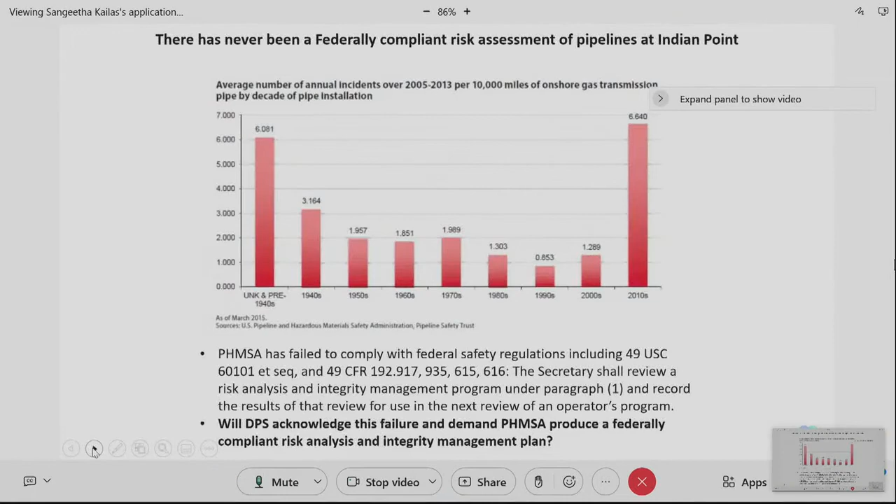Another thing to keep in mind is that emergency planning for Indian Point does not account for co-location of the pipelines at Indian Point. The evacuation plan is unrealistic. At my house, the picture on top is what I get in the mail every single year - a pamphlet about emergency planning for Indian Point and a pamphlet about emergency planning for the pipeline. Those two things do not agree with each other. I should neither shelter in place nor leave my house. I should neither pick up the phone and call an emergency line or not call an emergency line, if there's no agreement between these two documents for this community that lives at the intersection of the pipeline and the nuclear plant.

Holtec recently put out a survey that was designed, I think, to exclude people who need help in an evacuation, supposedly to look at what would be needed for that. It used a QR code for access to the survey, because we know people who maybe don't have a car or whatever are totally tech savvy enough to use a QR code.

It required a computer to take, it was only online, and it was only in English, as though nobody speaking Spanish lives in the 10-mile evacuation zone of Indian Point.

And I raised this in an email to some of our county folks. Also, the emergency planning at the 4-county level has never done a scenario involving the pipelines and Indian Point. They do these trainings with FEMA and the Office of Emergency Management, but they've never done one that includes the gas pipelines. This pipe crosses under Route 9, 684, 84, and the Taconic. So if we're going to talk about a problem at Indian Point evacuating, and we've never considered the pipelines that bisect a large portion of this 10-mile evacuation zone, including the Palisades on the Rockland side, it seems like they should be considering it.

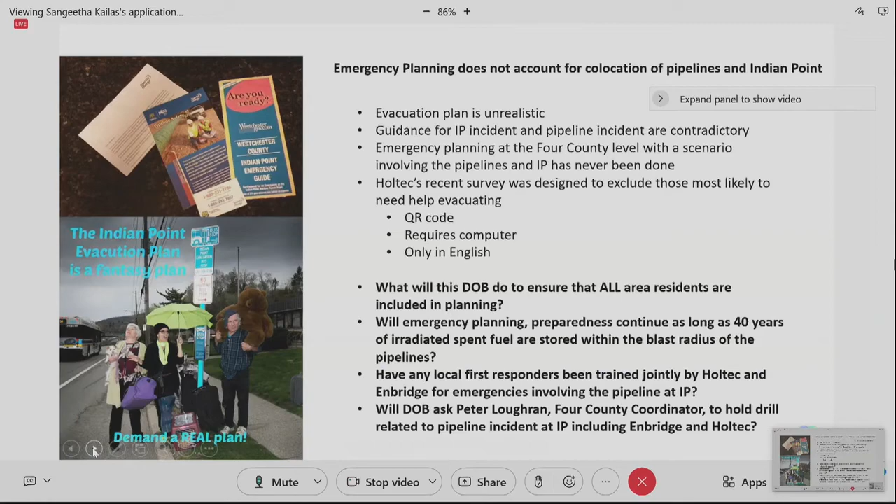So I have a bunch of questions at the bottom, and I also have a lot of slides, so I don't know if we want to answer all of these. I think the big ask would be for this DOB to urge the county, the 4-county coordinator, and the federal folks involved in those trainings to do a scenario involving the pipeline. Also to address the fact that Enbridge and Holtec check their boxes saying they do the necessary trainings of first responders, but I don't know that anyone ever asks the first responders if they've actually had these trainings. I have asked them, and it's like a binder gets dropped off with a box of donuts and a jug of coffee. That is not adequate training. So I would ask that before allowing them to tick the box that they've trained our local first responders, you actually talk to our first responders and find out what those trainings look like.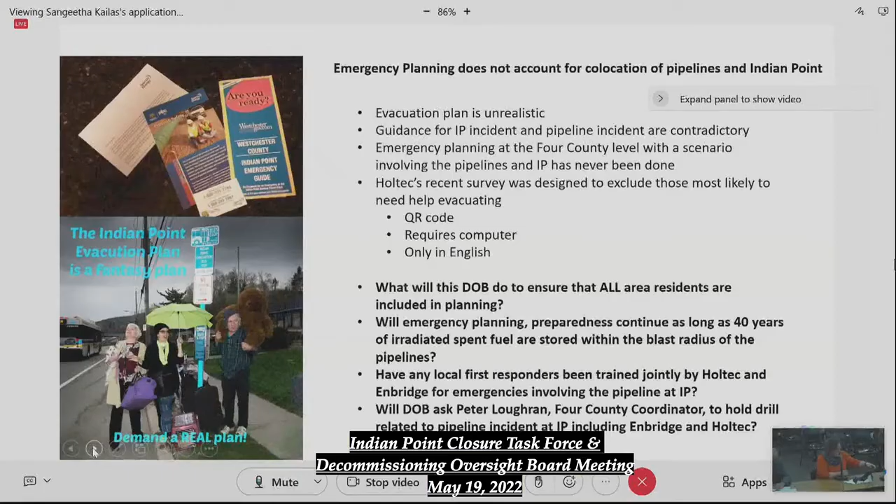So we know that Enbridge is currently doing additional work to hook up their auxiliary pipeline under the Hudson River to the 26-inch pipeline. On the right is a picture of an Enbridge auxiliary pipeline under the Arkansas River blowing up. Enbridge didn't even know this had happened until an angry tugboat captain called the Coast Guard because his tugboat was damaged. The Coast Guard remembered there was a pipeline under there and called Enbridge, who confirmed their pipeline had blown up, and it took 48 hours to let the city of Little Rock know there'd been a pipeline rupture. On the left is the same pipeline, owned by Enbridge, blowing up in the middle of nowhere, Pennsylvania, but still managing to nearly kill someone.

On the bottom, I've overlaid that blast radius with the area between my kids' school and Indian Point. What you can see is that it would level the school, the ball field, the backup generators, and the substation that provides power not only to Indian Point but a large chunk of the Northeast, and which was responsible for the blackout that happened in the 1970s. So I think we really need to take into account the risks posed by this pipeline, and I don't think Holtec appreciates them at all. I'm wondering why Enbridge has never been here to answer for their own safety, because as much as we yell at Holtec, at least they're here talking to us.

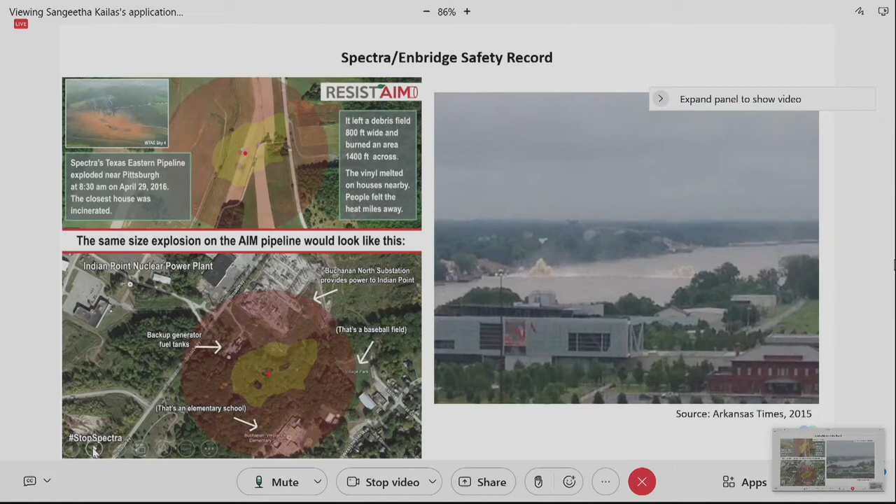So the first of 4 risk assessments that resulted in zero action was in 2015, commissioned by the town of Cortlandt. We had Rick Kuprewicz from Accufacts here to talk with us about this, along with Paul Blanche, because they had the necessary security clearance. So my questions: has DPS reviewed this assessment? Does DPS agree with the conclusions that the safety evaluation and analysis is seriously deficient and inadequate, and what's being done to rectify this? And if you don't agree with the analysis, why not?

So this was a dated analysis, and as you know, we've been around a few times on various risk assessments. And part of the state's risk assessment did evaluate this one at that time.

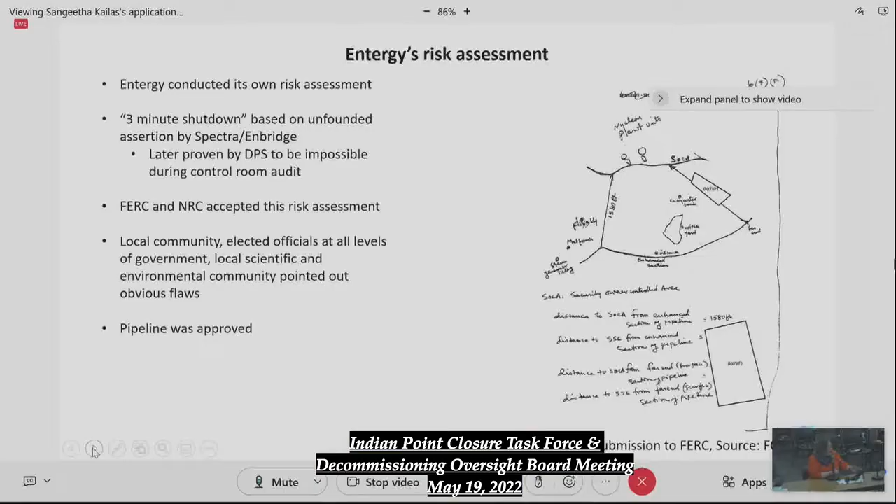Okay, cool, then we can go to the next slide, because that's the state's risk assessment. Oh sorry, this is Entergy's risk assessment, just so everybody can see the picture that was actually submitted by Entergy as part of their safety assessment and accepted by both FERC, the Federal Energy Regulatory Commission, and the NRC, the Nuclear Regulatory Commission. You probably can't read it, but somehow FERC and the NRC did. That also included the nebulous 3-minute shutdown, where Enbridge said they could shut down the gas in 3 minutes, which we now know to be completely untrue, and which this community, some elected officials at this table, and activists in this room called out at the time, but the pipeline was approved anyway.

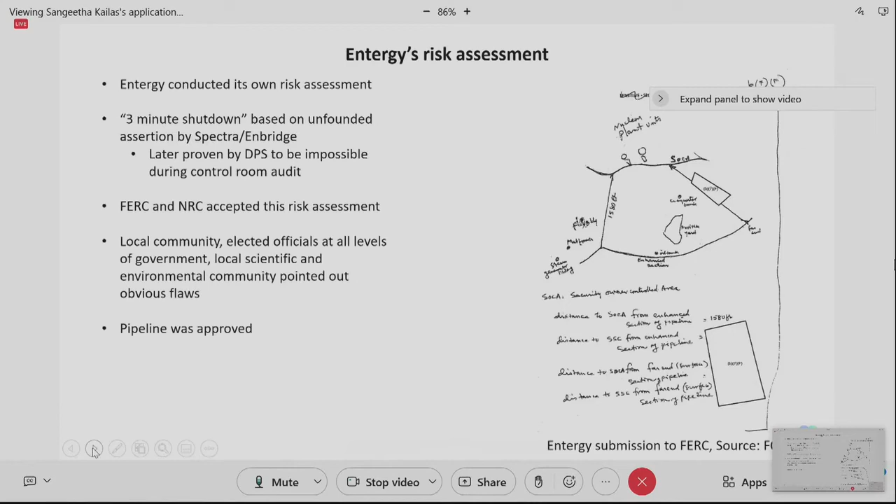We can skip this, I guess. This is just to put on the record.

We had Rick Kuprewicz here last time, singing a different tune from what he told the Nuclear Regulatory Commission on numerous occasions. What does he say in his own words? Security claims should not be permitted to shelter malfeasance in a scientific method involving incomplete risk analysis for such a highly sensitive structure. Next slide, please.

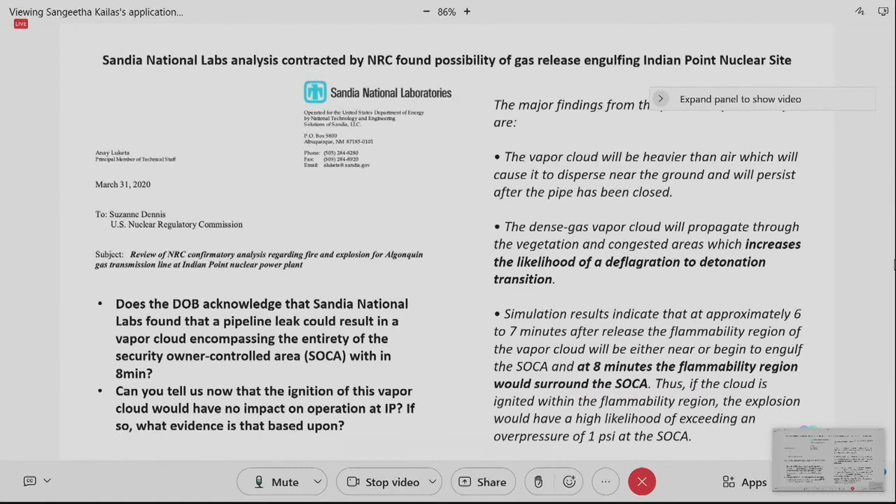And can I ask a question about that? So when did the folks at Princeton conduct this analysis? So the paper was published in 2017. Right, I'm familiar with the paper.

Yes, so we reached out to them shortly after that and asked them to model it. They used the same weather data from 2015 to model it on Indian Point. I understand that, I'm familiar with this study, and there are some related studies with it as well.

I just want to put it in perspective, in a historical chronological sense. In 2015, 2017, whatever the date was, that was while the 2 units were generating power. It's a different situation now. There are no operating reactors. There is spent nuclear radioactive fuel in 2 spent fuel pools. That fuel is going to be removed from the pool to a different type of storage configuration.

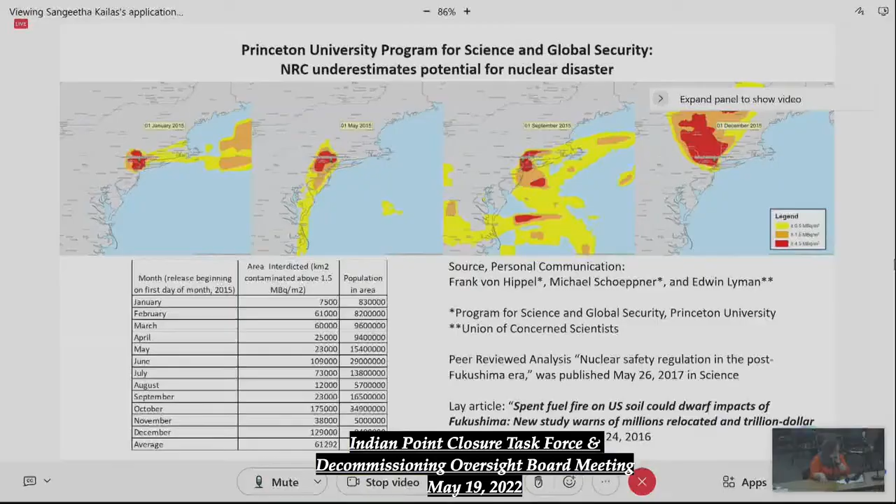So we had a hearing put together by our federal electeds, because we harass them just like we do our local and state electeds. They came to Cortlandt, and we went through a lot of this same information. I think it was somewhat embarrassing for them to claim they hadn't seen this, they didn't know about that, and we just produced document after document after document that they were CC'd on. We laid all of this out, and they didn't do anything about it.

Or they said they're doing this, Oak Ridge National Labs is doing yet another risk assessment. And again, they said that this 3-minute shutdown doesn't amount to non-compliance, which I think the public, there's the letter of the law and the spirit of the law, and it's really obvious to anybody who looks at this situation that the spirit of the law was most definitely violated, and they got away with it, and so now there's no consequence.

So questions for the DOB, again, this issue of the 3 minutes, but what is the status of this study? And why, if this study is necessary, is decommissioning allowed to proceed and gas flow in light of the regulatory failures and the need for this additional risk assessment?